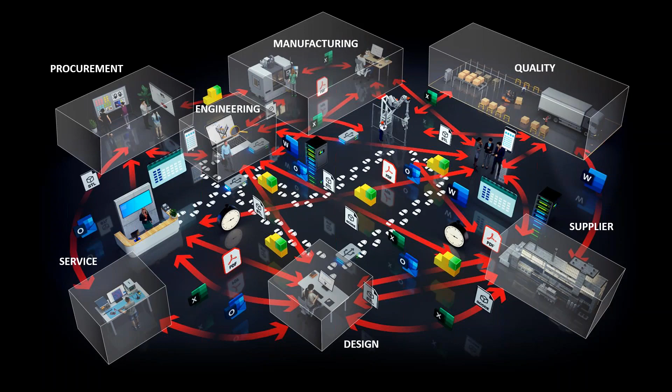So this is where the Fusion platform comes in. The value of Fusion for many companies can be huge. It provides the whole organization with one common place to go for all product, project, and service-related information. So it gives everyone full insight that has access to the platform.

It also removes waste from processes by making them more efficient. And through easier access to that information, organizations can focus more on value-added tasks and less time spent on wasted activities.

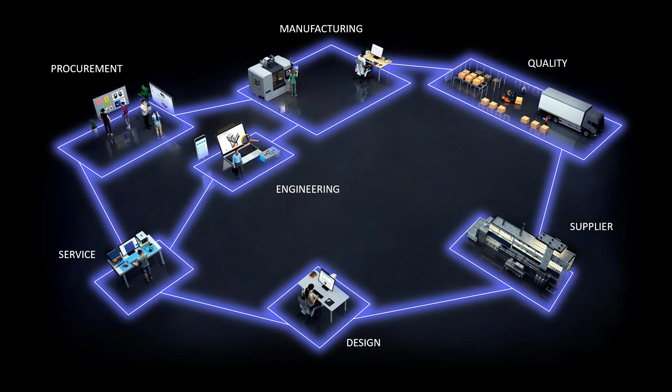Plus, it removes the need to duplicate data across multiple systems, eliminating unnecessary work by ensuring everyone is accessing the same up-to-date information. Fusion platform really is the foundation for a successful digital transformation.

So let's talk about the attributes of the platform. Notice that I'm not talking about a software application. Fusion truly is a platform for company growth through process maturity over time.

Autodesk Fusion Manage is uncomplicated. It's a true SaaS cloud-based solution that provides anytime, anywhere access with an intuitive, easy-to-use web experience.

It's accessible, gives you a central source of product-related data, multi-CAD integrations, and an open API to bring in upstream and downstream data from other business systems like ERP, MES, and CRM.

And it scales with your business. You can start with one process at a time and easily expand as you need to.

Everything we just talked about in terms of being uncomplicated, accessible, and scalable is how we provide these capabilities, how they're delivered. The three major capabilities are data management, bill of material management, and change management. These primary capabilities basically define the core.

Other capabilities such as quality, supply chain, and new product introduction are really wrapped around and added to the core.

Beyond the core, Fusion also includes additional processes that you can install conveniently from the App Store. The Fusion 360 Manage App Store is a collection of ready-to-implement workspaces that contain business processes and templates available at no additional cost.

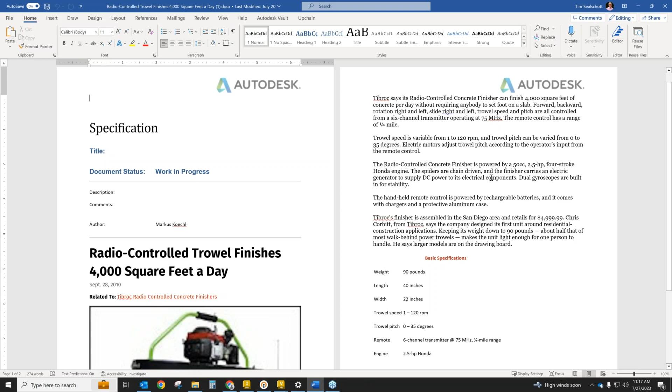The specification tells me that I need to create a radio controlled trowel that finishes 4,000 square feet a day, with a description of how we want it to work and some basic specifications that I'm going to use as the basis to create my design with.

So if I go back to Fusion 360 Manage, I've already started a project that is structured around introducing this new product design based around a phase gate process. This is completely configurable, and out of the box, we set up these phase gates so that we have different gates or milestones that our project has to go through, and certain people have to approve it in order to make it to production.

So for example, I've already started this, and as part of the project, I can create templates that set out predefined approvers, the different project phases and how long they should take, and who the required approvers are for each stage gate.

So this is information that can be templatized along with specific tasks that need to be created as we enter the different stage gates and how many days left I have to complete them. And these can actually serve as milestones.

So by standardizing this, creating different templates that have different tasks involved for whatever type of project it is, whoever the approval groups are, I can create these templates, have them automatically filled out for the tasks required to complete each stage gate, or I can add them on the fly. This gets me to create this new specification, which I've attached to my project, and I can view it from the project right inside of my NPI process.

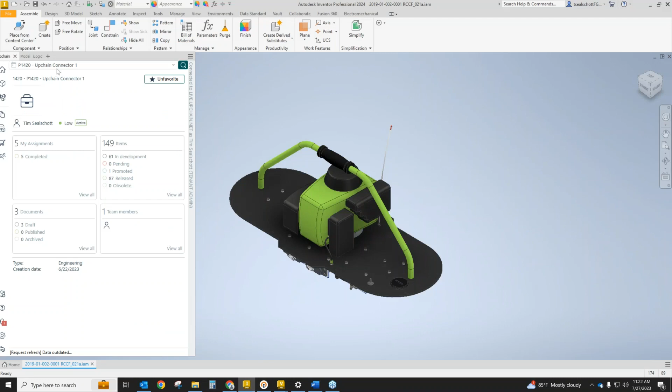So now I can go ahead and build the project inside of Upchain, and we'll look at its bill of material. By opening up the design in Inventor, hitting the refresh button, you'll see it extracts items and BOM structure based off of how I've designed the product inside of Inventor. So I've already done the work, built the bill of material, got the items created, and the assembly is checked out.

So what I'm going to do now is check this back into Upchain, since I'm using Upchain as my PDM system. Any documents or drawings that are associated and have the same name as the assembly get picked up, and they'll be added to Upchain.

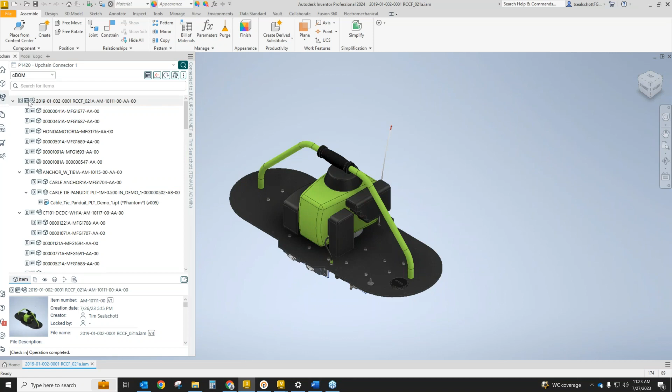We'll give it a little bit of time here to check in all the files. Now we can see they changed from the lock that was in front of the item in green color to black, bold. So now we have these items in Upchain. If I go to my web app, we'll open up the Upchain connector project and look at the bill of material for it, and the items have been added inside of Upchain.

So here is our bill of material that we've extracted. We can see some of the properties and metadata that were created and brought over from Inventor, which we can view in Upchain and manage the bill of material. We can view the items once visualizations are made.

So you can see right here that we're getting conversion in process. Once these are finished, I'll be able to view the assembly right from Upchain and its drawing. Just look at one of the nuts, for example.

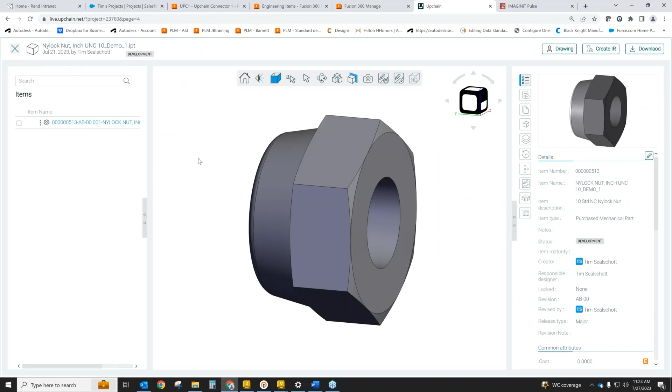So here's a real world view. We've actually got other translations that are created down here at the bottom. You can see that we have an STL file that's been created, a PNG file, a step file for drawings. We can have it actually create PDF files. And my goal here is actually to get this bill of material released now.

So right now you can see it's in a development state. So by creating a change request, setting a workflow and saving it, by working it through this change request workflow, we can get the items of the bill of material items released.

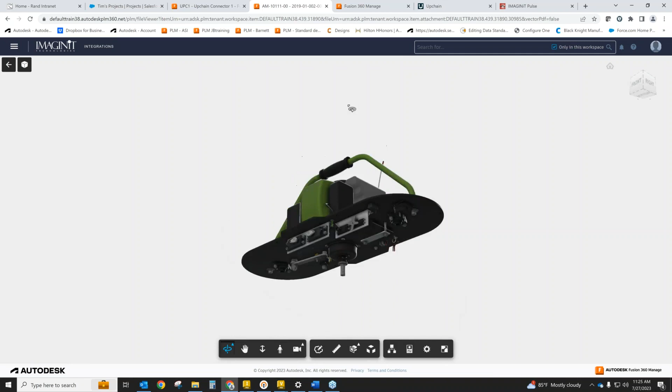And then once the item is released, our Pulse integration picks up and actually creates the items inside of Fusion. So if we look in Fusion 360 Manage, we'll notice that we have this assembly that's been added. Its PDM state is released. And any of the models, like a step file which was created during the integration, are viewable inside of Fusion 360 Manage. And we've got a bill of material now for our process that we had in our NPI process that now can be used in other processes inside of Fusion 360 Manage.

So for example, one of the things I want to do is, let's say, as part of this process, we've got the entire engineering BOM, all 52 items. I'm going to release one of the items in here so that our procurement department can go ahead and start ordering some components.

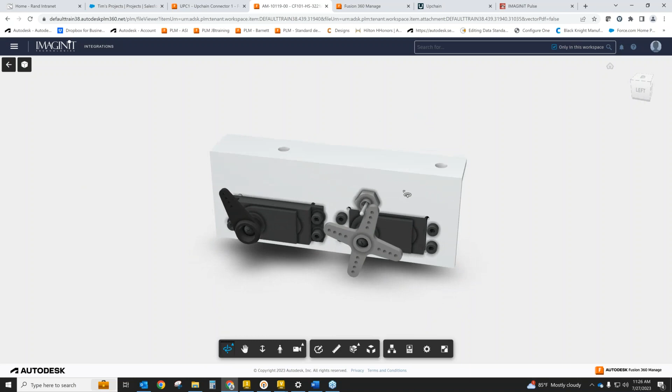As part of this NPI process, so what this little sub-assembly here, which is kind of like a servo motor, I want my procurement department to actually get started and start ordering this, so that this is like one of those long lead items that I want, not only to order, but to see if we have anything in inventory and what it would cost.

So again, using our digital transformation platform, using Fusion 360 Manage, all of my procurement, all of my inventory information is stored in NetSuite. So as part of my workflow, what I'm going to do is actually release this item from my bill of material. And the way we do that in Fusion 360 Manage is by creating a change request or another change order inside of Fusion 360 Manage.

So what I'm going to do is create a change order, give a little note, and again, like we did with the NPI process, we have templates that we can choose from that automatically set up task and approval processes that need to take place in this change order.

So I'm going to choose, you can see the list I have, I'm going to choose the mechanical change template with my name on it. So what that'll do, it'll automatically set me up as the assignee and the approver as part of this change order process to get these items released and inventory checked.

And what we want to do is go ahead and set a life cycle, which will release to production, which will change this revision to an A. So it created a new change order for me with that item.